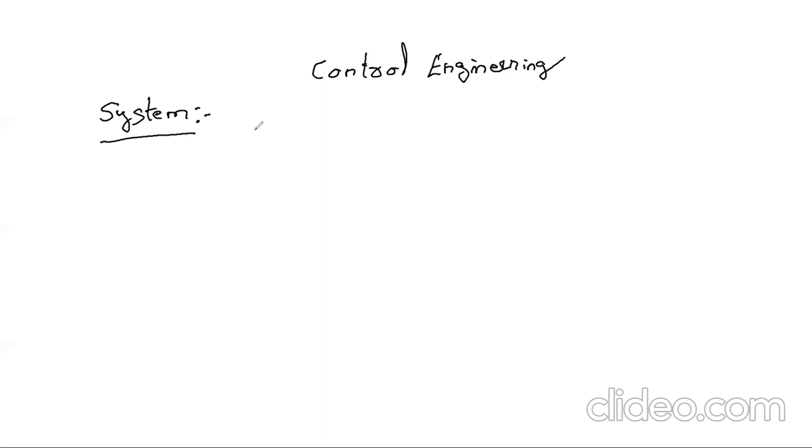So the first thing we need to look at is what is a system, because that is what we would be controlling. So control engineering, or it can also be called as control systems. So basically we will be controlling the different mechanical and electrical systems. So let's take an example of a braking system. So basically a braking system would consist of the brake assembly. So the first thing that it would consist of is the brake assembly.

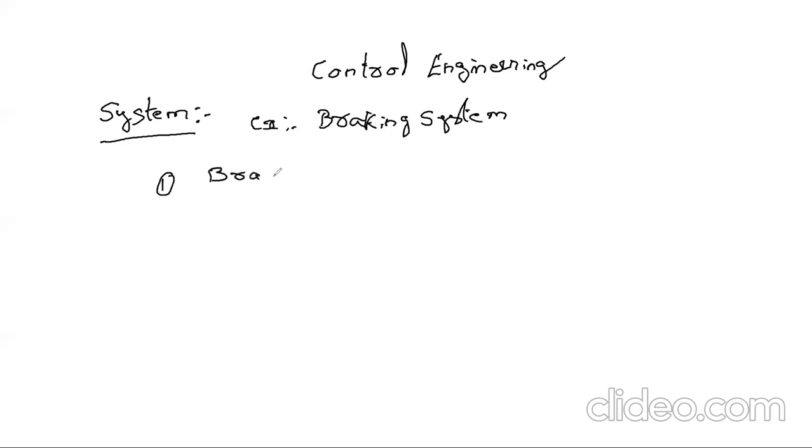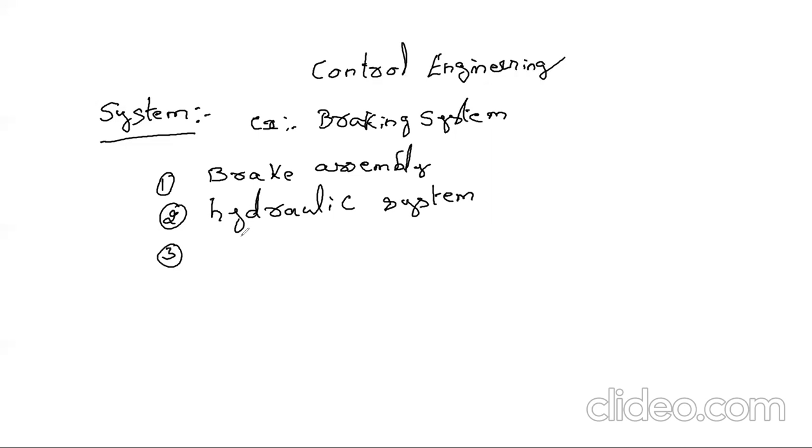The second thing that it would consist of is the hydraulic system, which would apply the pressure for engaging the brake. Hydraulic system. The third would be the parking brake, which is different from this other brake. Parking brake, and the lighting system, and the lights which appear when you apply the brakes. So you have the light system, and then we have this ABS to avoid skidding of the vehicle when you apply a sudden brake to the vehicle.

So all these, the brake assembly, the hydraulic system, the parking brake, the light system, the ABS, can be individually called as a system, or you can call this entirely as a braking system and call each assembly as a subsystem. So either you can call this braking system as a whole system and then call these each as a subsystem, so that the work can be divided among the group of employees to work on each particular thing, so that there is a specialization.

So a group specializes on the brake assembly, another team specializes on the hydraulic system, there will be another team which works only on the parking brake, there may be another team which works only on the ABS. So each part is done by different teams in the industry, and all these can be thought of as subsystems, and the whole thing as braking system. But the other way to look at is each is a system. The brake assembly is a system, hydraulic assembly is a system, the parking brake and this light is a system, ABS is also a system.

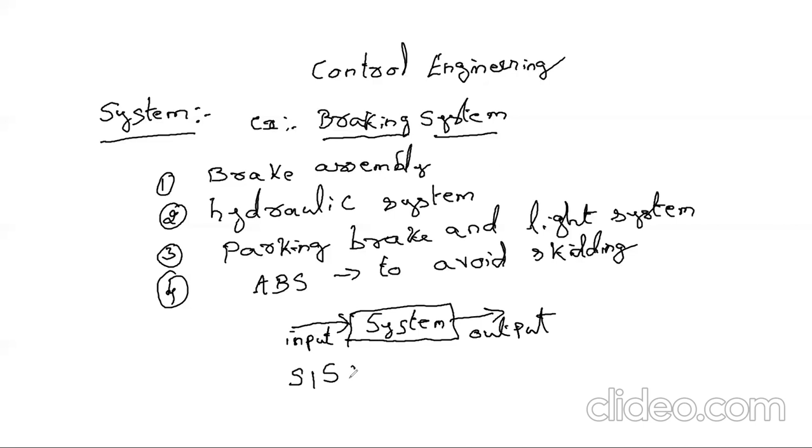So you have studied mechanical systems when you have undergone the mechanical vibrations course, where you looked at mechanical systems, for example, an automobile, a bike, a person riding a bike. So you have done the mathematical modeling, that is the modeling into the spring, mass and damper systems, in the course last semester. So you are aware of how to model a mechanical system.

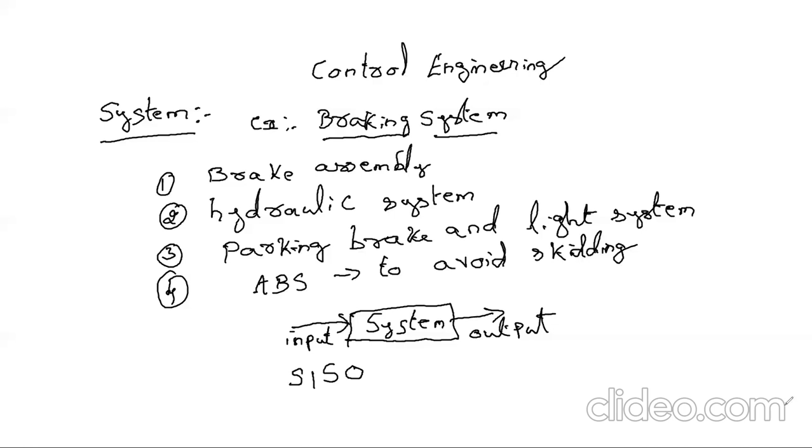It might become complex when the system is complex. It's simple to have a spring mass and a damper, or two masses, two dampers, two springs. You can model it based on the system, but when it gets complex, it's difficult to do it based on the physics. So basically what I'm trying to tell you is you need to identify the system.

Before controlling a system the way we want it to be, you need to identify the system. Suppose in a company, a product like a hair dryer is given, and you want to have a control system for this. For that, you have two methods. One is the white box method, and the second method is called the black box.

The second method is called the black box. In the white box method, you use the concept of physics. Suppose you have an input, this is the system, and this is the output. So you have to find out what the system actually is. You cannot have text or an image and solve a problem, you need to have a mathematical model.

Suppose if a hair dryer is given for feedback control, you need to understand that hair dryer system and write a mathematical model for it. So writing a mathematical model is important, but this becomes complex for every system if you go with physics concepts. You may not be aware, or it would be difficult to apply the concept of physics for a complex system.

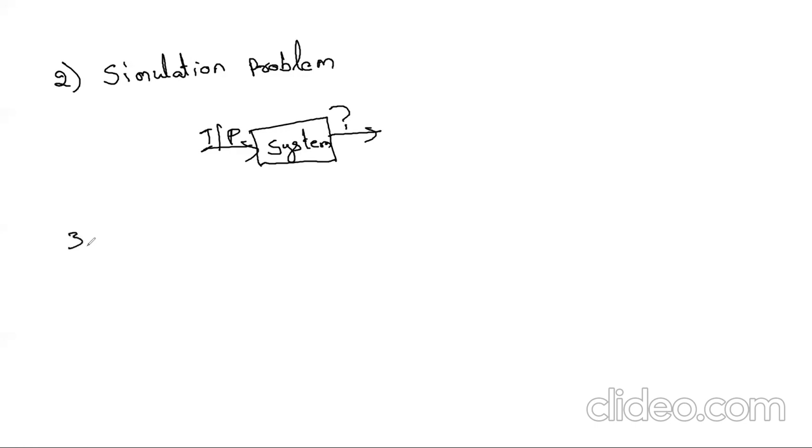So, with known inputs and a known mathematical model, what is the output of this? This is called a simulation problem. The third type would be the control problem.

In this, you have the system, and you know what is the output that you need, but you need to identify what input should be given to get that particular output. So this is a control problem. This is what we will basically be working on the whole of this semester. You know the desired output, you know the mathematical model of the system, and what input you need to give to get the corresponding output. So this is the control problem.

So the first one was system identification, the second one is simulation problem, and the third one is control problem. We will work on all three, but mostly, largely, we will work on the control problem.

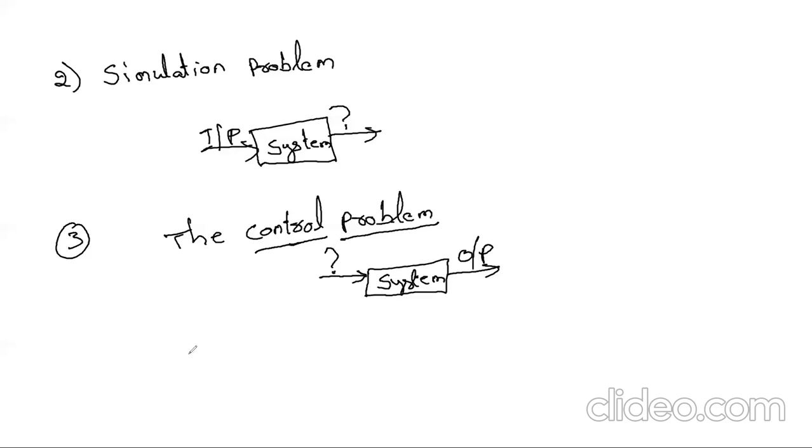So why do we need, when we talk about control systems, we talk about feedback. You are aware of the open loop control system and the closed loop control system. So why do we need feedback, or make the control system a closed loop? The reason is, if we go with open loop systems, it is basically suitable for simple processes that have well-defined input to output behaviors. So if you want to develop only a simple system with well-defined input and output, then it's fine. But for example, a dishwasher.

How much time the dishwasher should run, you decide and set it up. So without getting feedback on how clean it is becoming, just based on the time it works—10 minutes, 15 minutes, whatever setting time is given—till that time the dishwasher runs and cleans. It doesn't take any feedback on how clean it is becoming. So you don't have any feedback in that. These are open loop control systems.

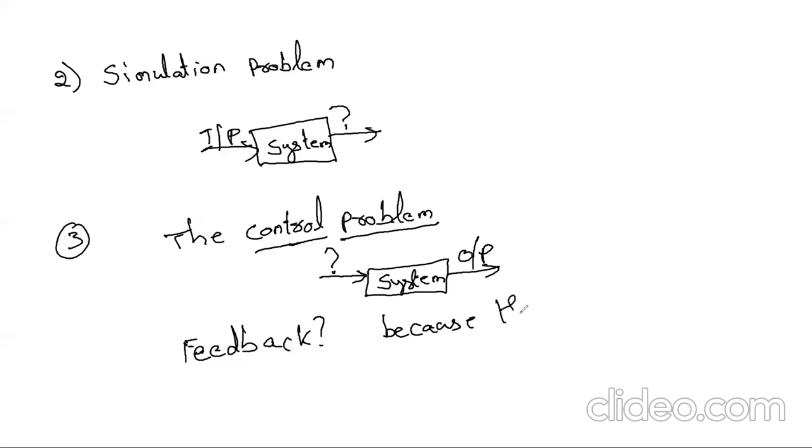But open loop control systems are not sufficient in all cases, because there are disturbances. Feedback is required because the main reason to have feedback is that there are disturbances. These disturbances do not allow you to get the required output. So since there are disturbances, the feedback becomes important.

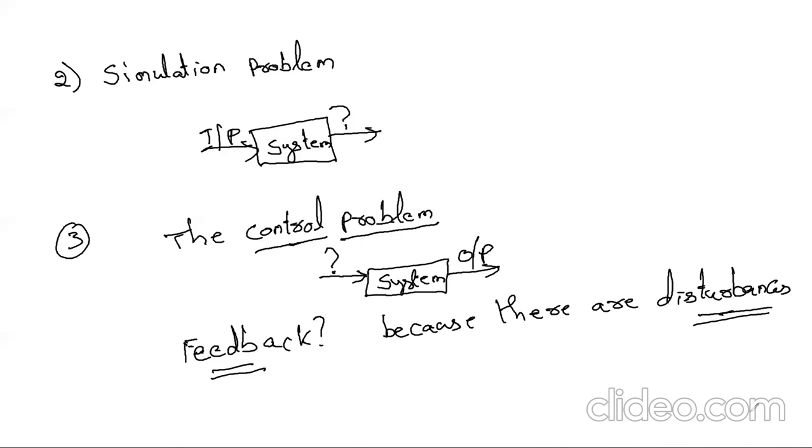So basically we'll define what a control system is. First we define what a system is. A control system is a mechanism that alters the behavior, or the future state, of a system.

So what you're basically doing is having a mechanism that alters the behavior, so it overcomes the disturbances and gets the required output. If this was an open loop system, it doesn't overcome the disturbances, and the output may be different than the required output. So if we have a mechanism that alters that behavior and overcomes the disturbances, then it is actually altering the future state of a system.

So this is the importance of a feedback control system—basically to overcome these disturbances during operation, which we cannot plan for. In an open loop control system, we cannot plan for these disturbances, and they have to be overcome only during the working. So a feedback control system becomes important, and this is what we will be focusing on throughout this semester in this course.